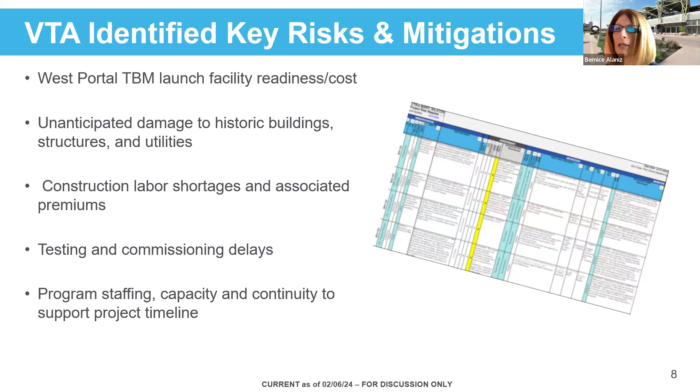Next slide, please. These are the next steps to get to that FFGA, which we have a goal of late November of this year, right around the Thanksgiving holiday. We'd be happy with anything before the end of the year. This assessment that the FTA is doing with their PMOC is supposed to be done in the middle of this month. And then we use that number, like I said, and we request to get into the next phase.

There's various phases to get to that FFGA. So we then take that information and apply to get into what they call engineering, New Starts engineering. That's kind of the last phase before you get funded. And we anticipate hearing if we get into that phase this spring, May, June. And then once we get into that, we submit our formal application for the funding we're asking for. And then it's several weeks for them to process that and say, yay, you're getting the money, which we hope for.

In an effort to do everything and anything we can between now and November, we're really heightening up our advocacy efforts. We need everyone to hear from our local leadership and community-based organizations, and to raise up to decision makers in Washington how important this project is. We're going to start several efforts, including frequent trips to Washington by project leadership, the GM, and our new Mega Project Chief Officer, as well as grass level meetings with key stakeholders to raise that message and help everyone know more about the project and its benefits at every level. So we're going to be starting a breakfast series.

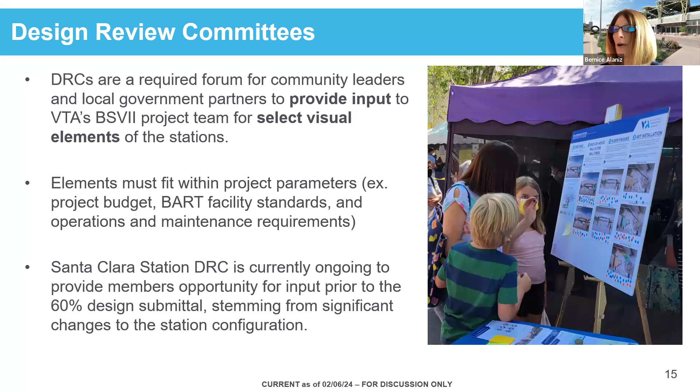We had our first series of DRCs back in 2021, and then we are partway through our series. We advanced the Santa Clara station because there were significant changes to that station and how it was laid out, so we did that one earlier. Now in the spring, starting in April, we are going to engage the other 3 DRCs for the next phase to look at those other facility aspects we're going to work on.

So this was what I just said: in 2021, we got input that was needed for requests for proposals, and then this year and end of last year, we resurged the design review committees.

So these are the types of things for each of the stations. And I don't know why, but oh, there we go - my slides were cutting off.

The downtown San Jose station, we're going to be looking at the ceiling and exterior marquee and station signage. We'll be looking at architectural and aesthetic treatments of the east emergency ventilation shaft, and you'll see exactly where that is when Adriano goes over that station site plan. We're looking at the exterior and interior finishes, floors, and like I mentioned, locations for art.

Very similar at the Diridon station, basically the same features at that station.

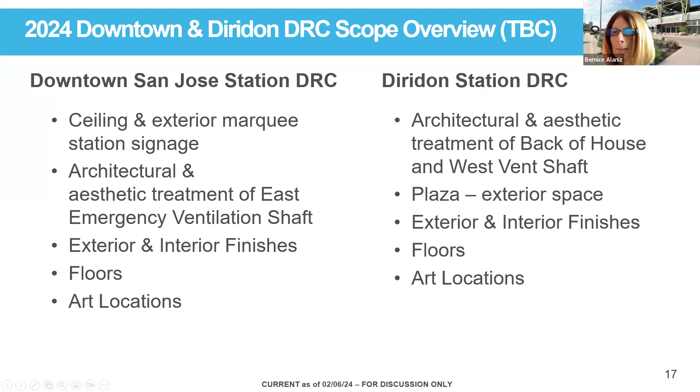Santa Clara - these 3 elements at the top were related to significant changes. Previously, the way the station was designed, coming from either the west or the east, passengers would need to go up and over a set of tracks and drop back down into the center platform, which was between the 2 BART tracks. They'd also have to go, if coming from the east side, over some storage tracks for the trains. The station was redesigned so that it's like an end loading station. Now passengers basically board at grade, with no up and down movements going up escalators, upstairs, or up an elevator. So it greatly improved the passenger experience, but it did change some aspects of the facility.

So there's now a station entrance canopy that they weighed in on. There's a platform canopy configuration, and then there's the parking structure and how that integrates with the new building - they weighed in on that too. The other aspects are similar to what we're going to be working on, so that's why we advanced that committee before the others.

And then 28th Street, Little Portugal - pretty much the same things for that review, which will happen between April and May, as the other 3 stations.

This is our schedule for the April through May series of meetings, just wanted to keep you looped in on that. Then the last part of all of this - once the committees weigh in, we will be presenting this information to the public. We did that with the first series: we did pop-ups at each station area, and then some online displays of what the stations would look like, and had members of the public provide their input so that we could incorporate all of that into the station designs.

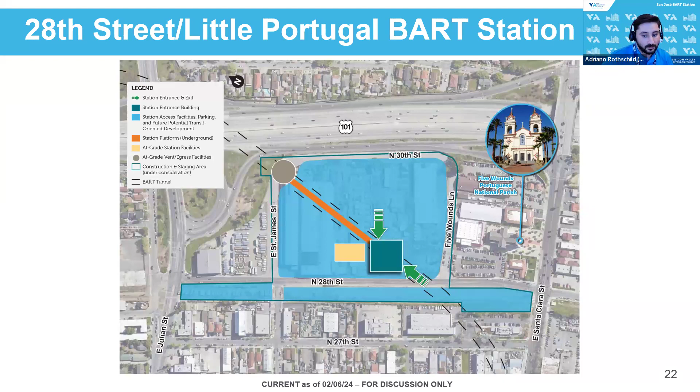Moving on to the downtown station, this plan shows the station with the platform below Santa Clara Street and two entrances on the north side of Santa Clara Street, and a vent shaft at the corner of Santa Clara and North 3rd Street. As you might have heard, VTA has studied and confirmed the elimination of the secondary station entrance previously located between 1st and 2nd Street.

The latest design of the downtown station confirmed elimination of that second entrance, as the projected ridership could be accommodated within the primary station entrance building.

The latest design of the downtown San Jose station includes an eastern concourse within the tunnel and a knockout panel that would facilitate a future connection to a station on the south side of Santa Clara Street. The city of San Jose is continuing to study and pursue an entrance on that south side at the corner of Santa Clara and 2nd Street.

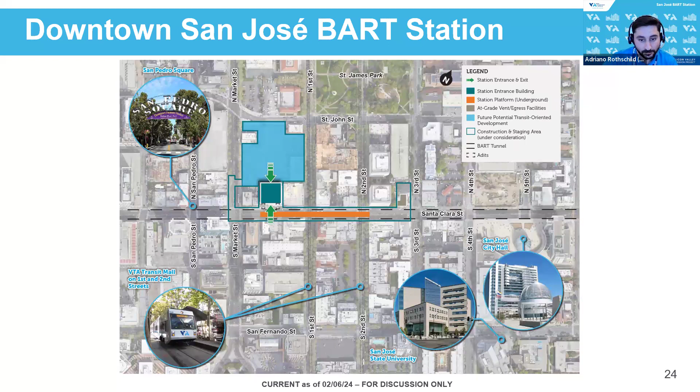The revised configuration changes the station entrance building from a circular to a square building above grade, which will better align with the surrounding urban environment. The back of house facilities, now shown in yellow, have been moved above grade. This significantly reduces the extent of excavation and improves access to maintenance and operational equipment. The new at-grade back of house building would also house a bike station and is being designed to accommodate a small amount of future retail TOD.

Through coordination with Caltrain and other Diridon intermodal station concept partners, the above-grade portion of the west vent facility at White Street has been reconfigured and shifted slightly. And the east emergency egress has been relocated to no longer be in the sidewalk of Santa Clara Street, reducing overall construction impacts along the street.

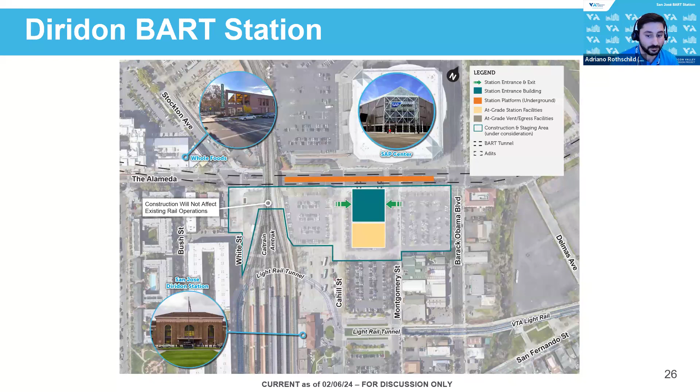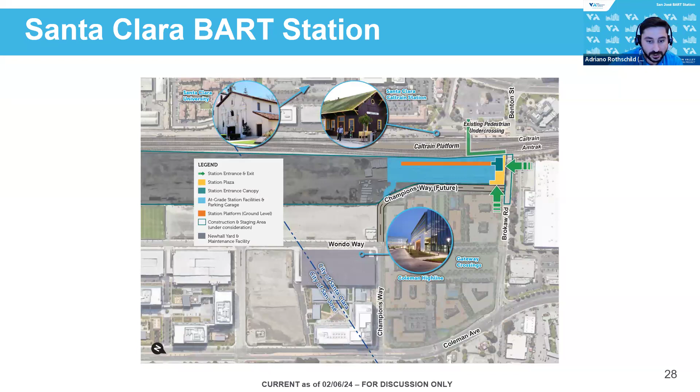This next slide shows the previous vertical circulation. Passengers and cyclists would need to access the station concourse from the road level by going upstairs via escalators or elevators, and back down to the platform again via stairs, escalators, and elevators. When coming from the existing pedestrian undercrossing, patrons would go up two levels to the concourse, as shown by the purple line, and then have to come back down.

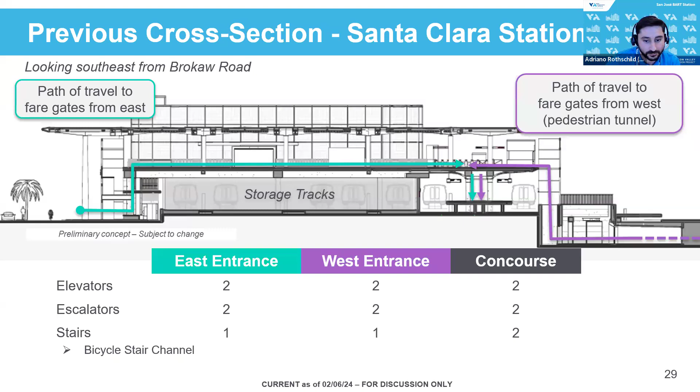Instead, this new concept, developed through much coordination with BART, really allows us to streamline access to the platform. As you can see, there are no longer any required escalators or elevators from Champions Way or from Brokaw Road to access the station entrance.

The slight incline level difference between Champions Way and the station entrance can be accessed via a short flight of stairs or the gently inclining sidewalk path along Brokaw Road. There will also be elevators within the parking garage to go up to that half level. Arriving from the west, pedestrians would utilize the existing underpass like today and enter the station entrance at grade from Brokaw.

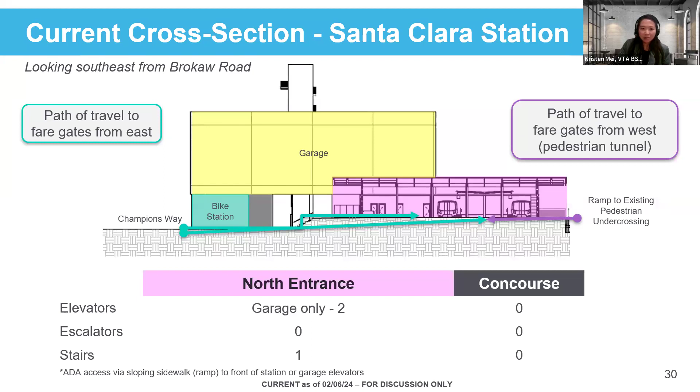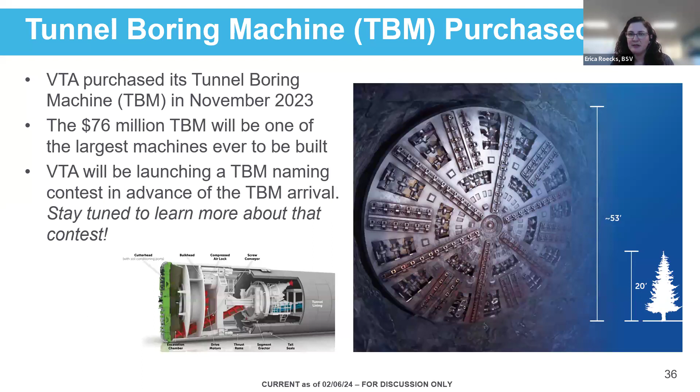We will be having a TBM naming contest in advance of the arrival of the TBM, taking into consideration ideas that were put forth in the Mercury News's contest that they held as well. So stay tuned to learn more about the contest. Kristen will be sure to distribute details about it to the group once we have that up and running.

Next slide. Just want to give an update on the early construction activities anticipated start. We anticipate in this next quarter of 2024 for those early construction activities to begin. These are the first 2 years of activities we've been talking to you about for almost a year or so, from our public meeting, including the grading and development of the site, construction of the tunnel lining factory and its operation to start fabricating the tunnel boring machine lining segments and their storage. There will also be excavation of the shaft and construction of the tunnel boring machine before it launches, all happening in the early construction time period for the first 2 years.

In addition, we will be working on a groundbreaking event that will be scheduled, and we'll let you CWG members know about it as it gets closer. So that's a brief update as of now for early construction activities, but more details are coming soon, and we'll be sure to give you additional details when we have them as far as timing.

Happy to take any questions. Erica. Yeah.

Tony asked: back to Charlie and our friends at San Jose State, has there been any effort to potentially do some learning opportunities with the design and engineering groups over at San Jose State? They have a terrific civil engineering program there, and this is once-in-a-lifetime type stuff. Any kind of coordination efforts started with this college?

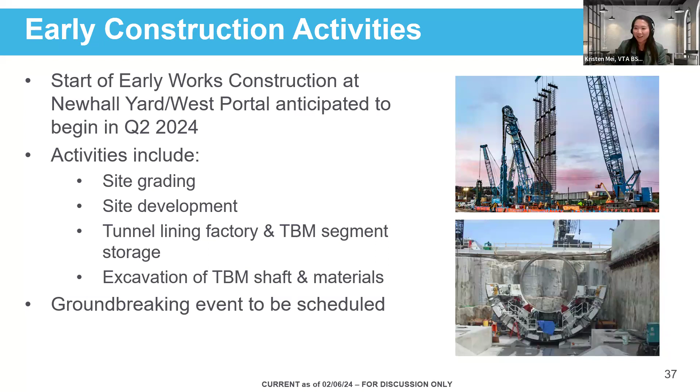All right, we will move on to our CWG work plan review and discussion. So wanted to share our 2024 draft work plan for this downtown Diridon CWG group. As a reminder, this work plan is subject to change according to project milestones that are ever evolving. We're planning on having our 4 meetings in February, May, September, and November of this year. But again, if there's a specific need or project milestone that arises, we may have additional meetings to come. And this year, I did want to highlight that we are gearing up for construction, as you've heard.

We'll be looking to have some updates presented, mainly focusing on our phase 2 program updates and the milestones that are paired with that in the different respective months. So with regards to FTA funding, like Bernice mentioned, there's a focus on the FFGA, the full funding grant agreement this year, and then also some contracting updates, some real estate updates sprinkled in there. And then also a focus on our construction updates.

So our CTMPs, looking to have an update, especially for the work that's happening in the 28th Street area in the spring, and then historic buildings and building monitoring updates where applicable, as well as general construction project milestones. So a lot of things on the horizon when it comes to our various construction activities.